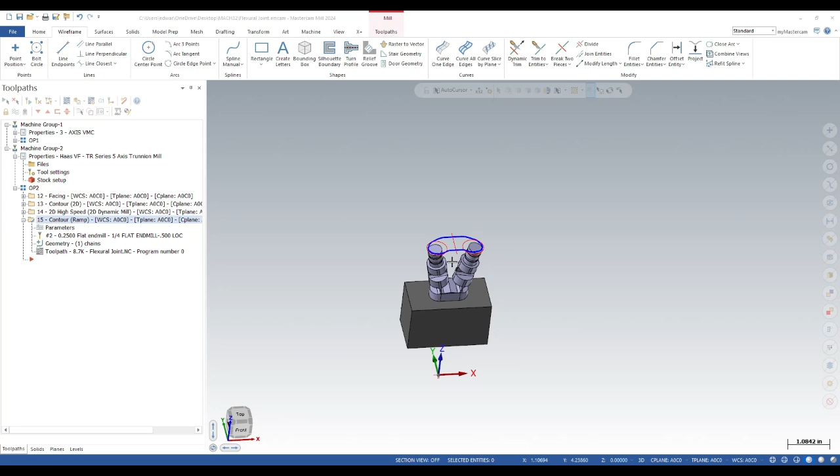Okay, here we go. Op2 part 2. We'll start working these columns a bit better.

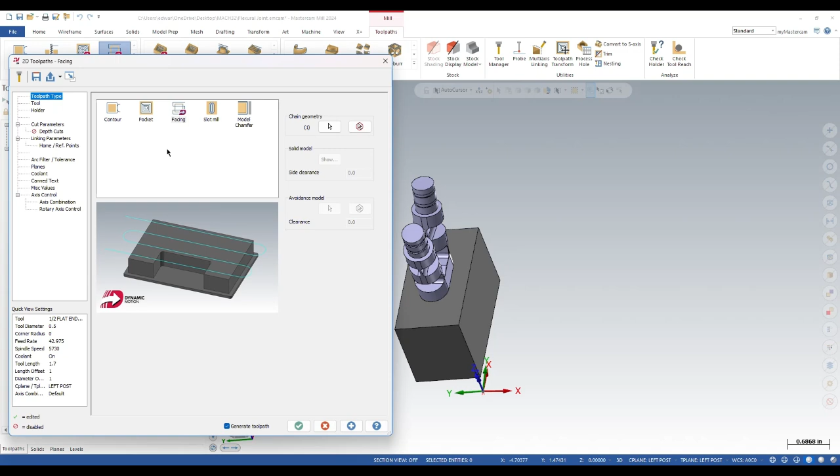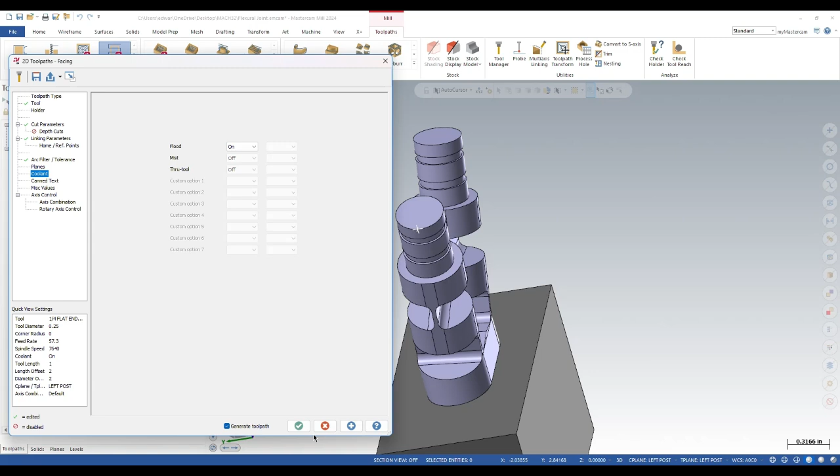Start off facing. Do a dynamic with a 30% step over. Double check my depth. Okay, all that looks good. Planes are correct. All right, one thing I forgot to do, let's go in real quick while we remember.

Set these to manual 0. If you're not getting the little message that pops up, it could be because you're not pressing enter after you type in the 0. So make sure you do that.

Alright, let's go back to WCS here. C and T on the left post. Alright, so facing. Alright, looks good.

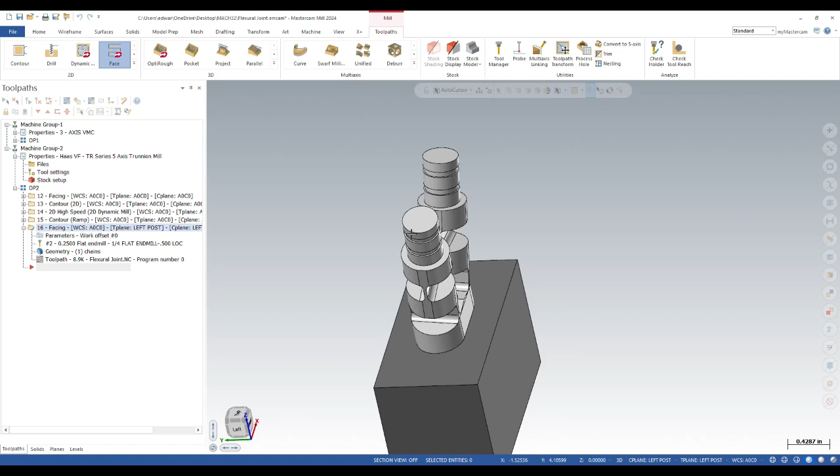Now I'm going to do a semi-finish on the first section of the column. Do it with a contour. Alright, want to make sure our arrow is pointing in a clockwise direction. Sticking with that 1/4 inch flat end mill. Cut parameters, I'm going to use computer.

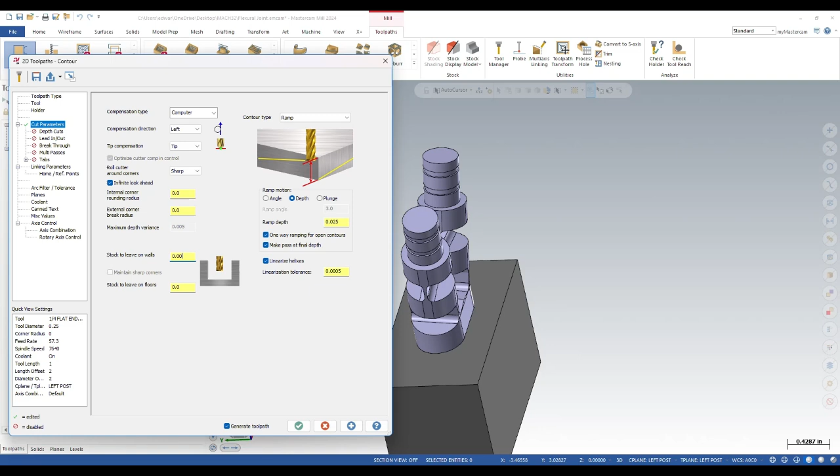Don't really need a cutter comp at this point, so I'm just going to do a semi-finish. I'm going to do a ramp, 25 thousandths per pass. I'm going to leave 5 thousandths on the walls. Do a lead in, lead out. I'll make it 20, doesn't need to be huge.

Alright, depth is going to be to this first step. Top of stock. Planes are good.

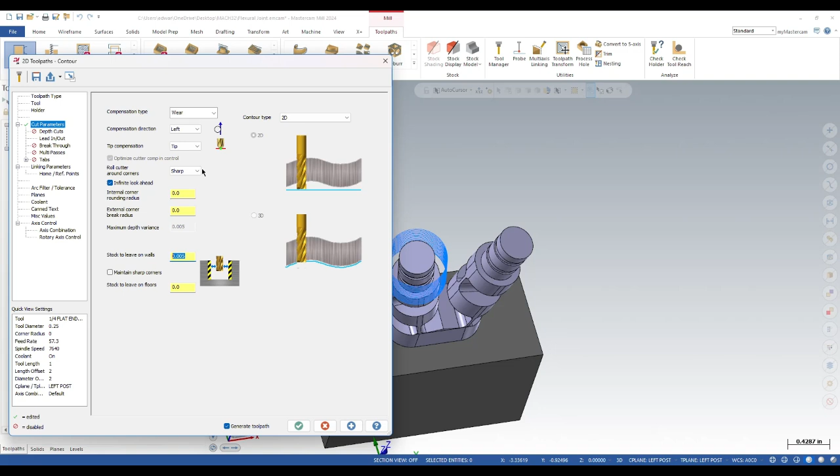Then we'll do a finish pass. Copy that one down. I'm just going to change parameters to wear compensation, 2D contour, leave nothing on the walls. Lead in, lead out's good. Everything else should be good. Green check it. Let's hide that. There we go.

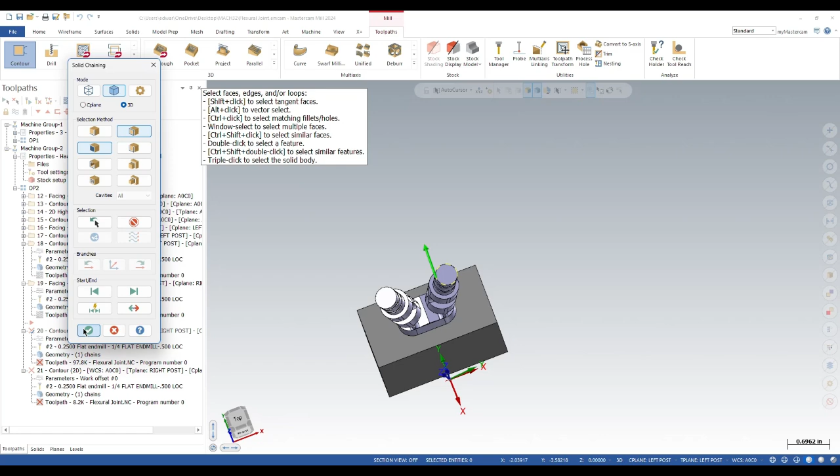Same now for the ramp. We want to make sure geometry's going the right direction, clockwise. Green check, green check. Gen. Alright, so let's see.

Should be fine, but if we're worried about the lead in, lead out, right, can do a little back plot. And it's fine, it's not even close. If it were, you could just go into your lead in, lead out and click this one, enter exit at midpoint, and that will change your lead in, lead out to the other side of the circle. So that works on any circle.

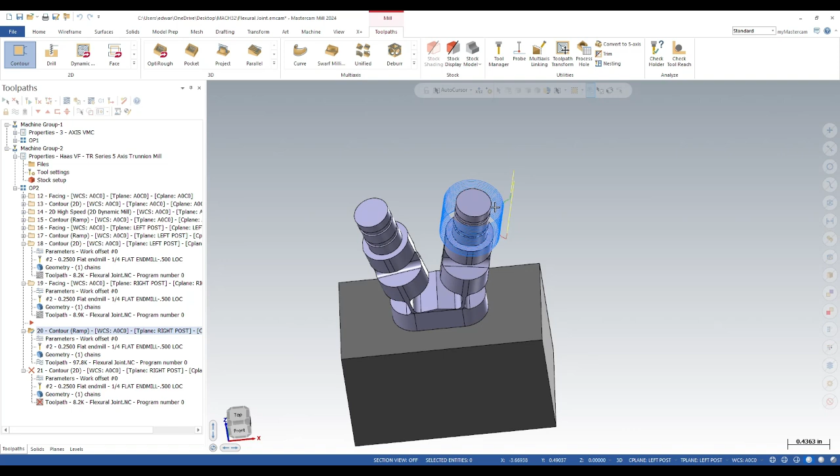All right, so now right click on the geometry, hold the right mouse button down, drag it down to the next toolpath, and replace. Oops. I can regenerate that one.

All right, same thing, lead in, lead out. We don't really want it on that side, so go to the lead in, lead out, enter exit at midpoint, switch it over to the other side.

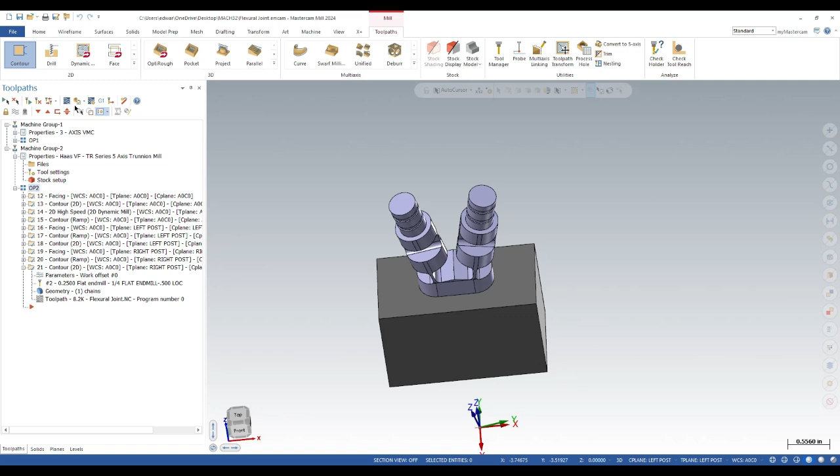All right, I like to save a lot, so. All right. So just working our way down. Next, I'm going to do the grooves before we continue down the columns.

So for the grooves, we're going to be using a key cutter. Let's see. Post, so we'll do another contour. I'm going to select the lower one right there and right there.

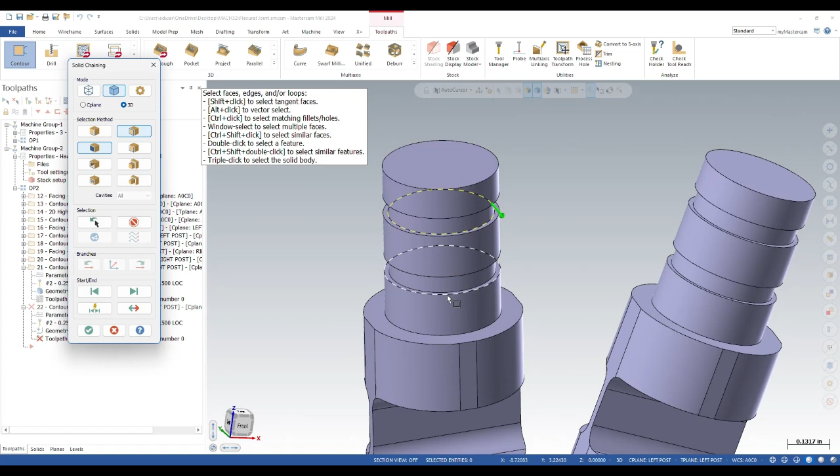I'm going to use a 1/4 inch diameter key cutter. There, so it's got 60 thousandths cut thickness. Just so happens that our little grooves are 60 thousandths wide also, so that's ideal.

I think that tool does not have 12 flutes. All right, let's see. Holder. I'm going to give you guys all this stuff, but in case you want to build these on your own.

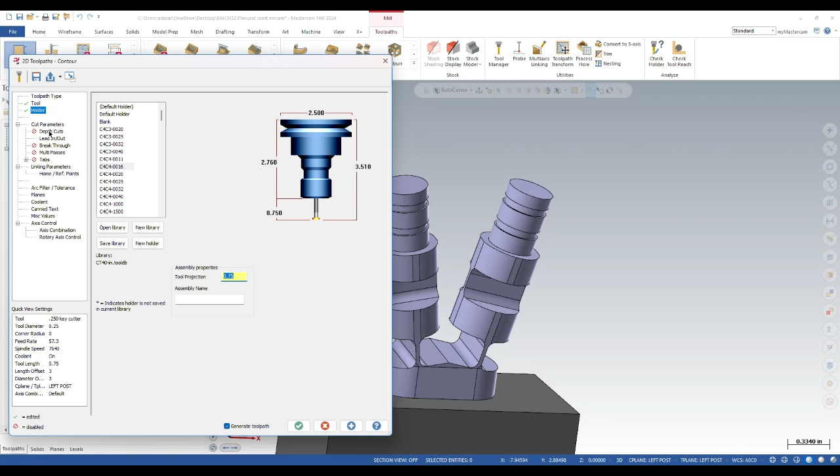Okay. Parameters, where, lead in, lead out, multi-passes. You go one and one spring pass.

All right, for the linking, for this one, since I'm doing both of the grooves in one toolpath, I'm going to use incremental 0 for my depth because I chose the bottom of it. So it automatically gives me the depth if that's what I want to use. So incremental 0, that.

Then just real quick, I'm going to go back to my finish pass. Forgot to activate that, so I want to do. I always like to do a spring pass on the finish passes. So there's the finish pass for the right post, and then finish pass for the left post.

1-1. Okay. All right, so there's the grooves in the left post. So we do the same thing for the right post.

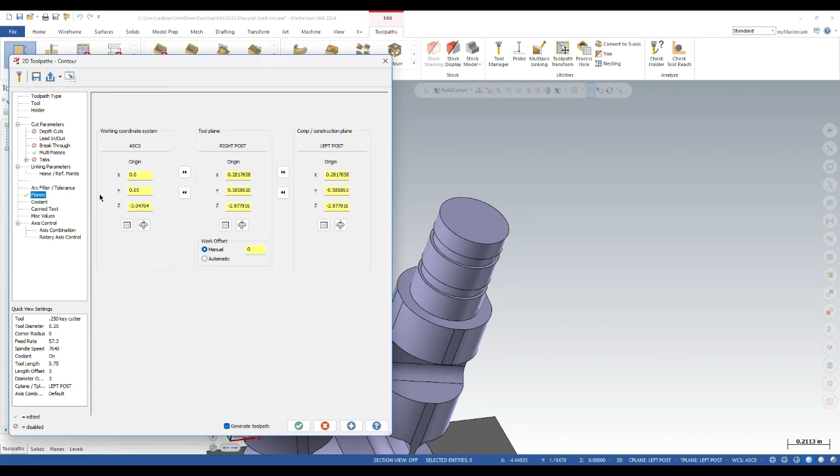And then that, come in here. Change my plane to right post. That, there we go.

We now save again. See, let's do a little verify real quick. I'm getting there.

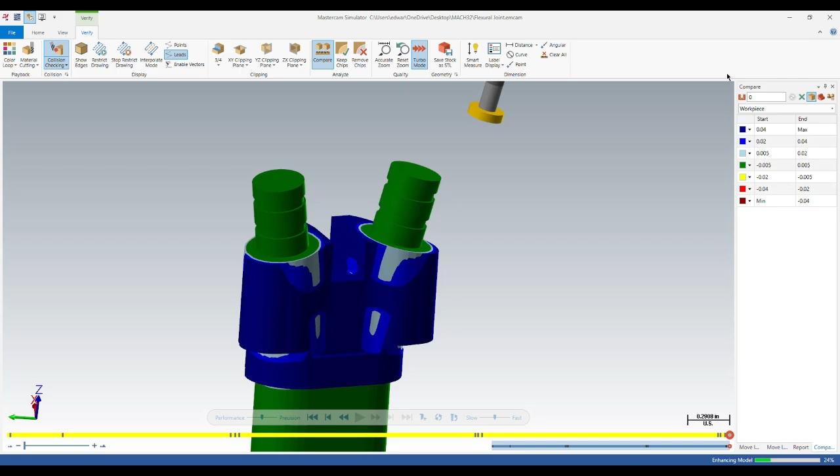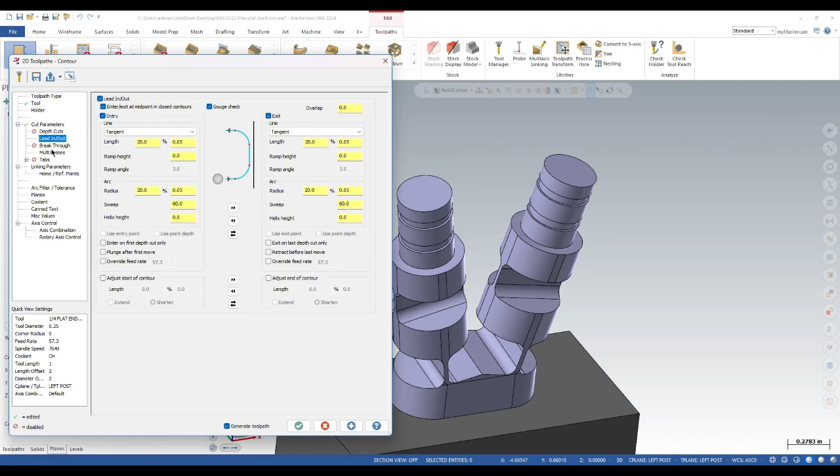All right, let's continue down those bosses. We're on the left boss right now, left post. Back to the flat end mill, and I'm going to do a little ramp. No multi-passes on the ramp. Linking. Let's go back to absolute on the depth and see how deep we can go. Top of stock - I'm gonna have to set that down here because otherwise it'll start ramping from the very top. All right, let's see what that does.

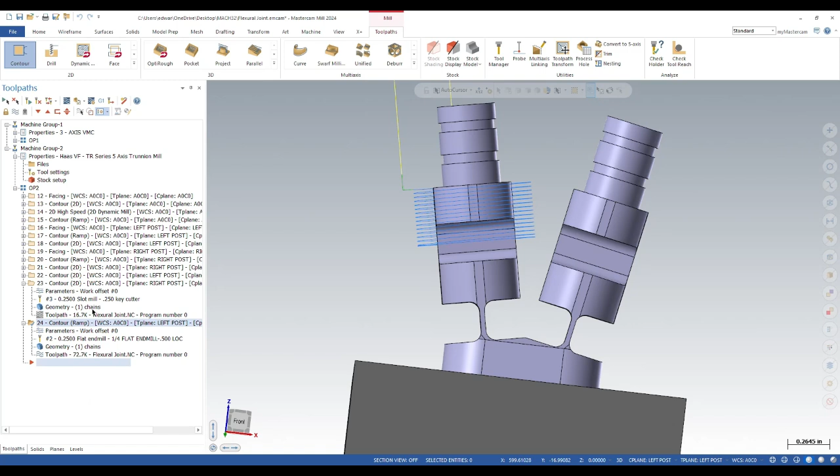Looks like it may be hitting the other side, but we'll have to do a back plot to see that. Close, but it doesn't hit, so we're good.

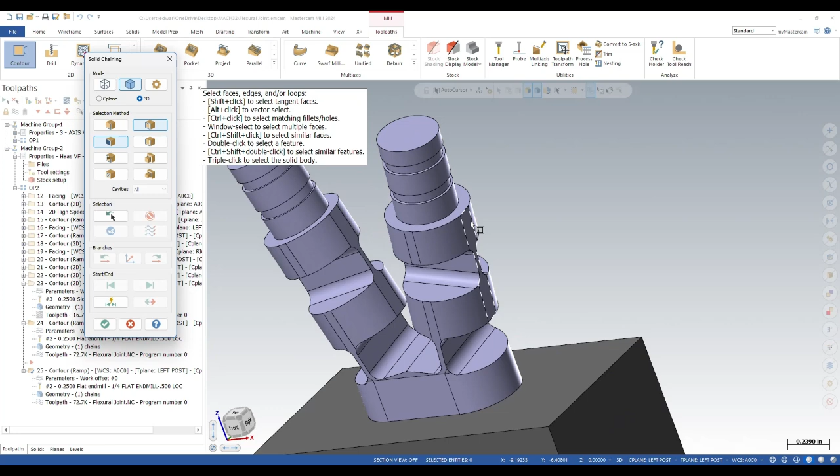All right, do the same thing on the other boss. Don't forget to change your plane.

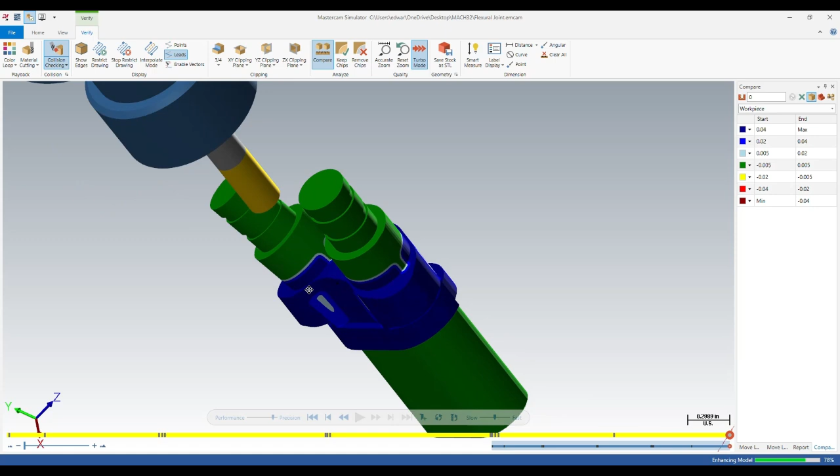Probably want to get rid of these ears hanging out next and start knocking that down as well. All right, let's go ahead and I'm gonna attack those ears on the side now.

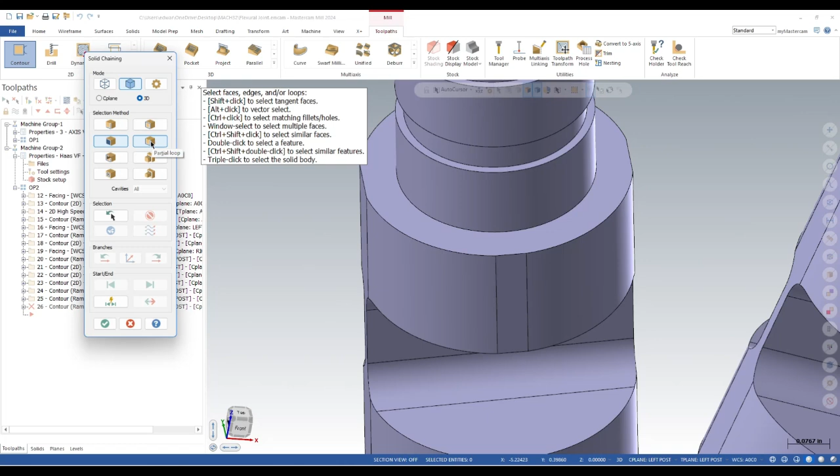Left post. The contour. Start partial loop. Start here on this flat and pick it on the right half so that my contour goes that way. Stop it on the other flat, right there.

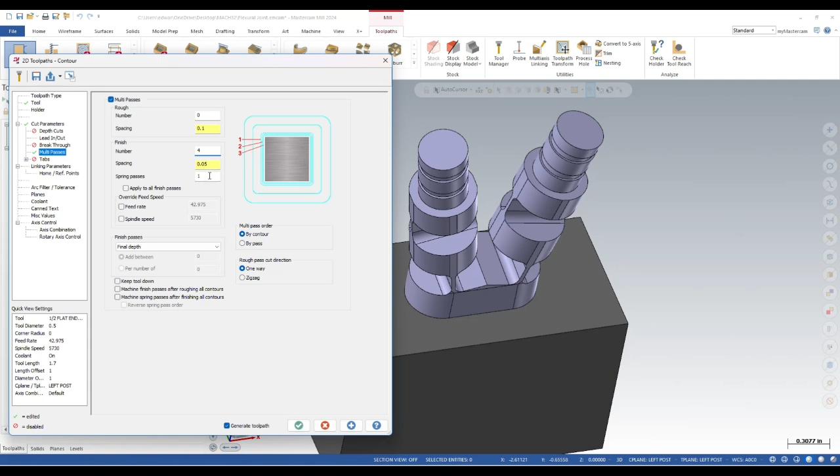Use the 1/2 inch end mill. Wear comp 2D. Alright, gonna do some multi passes, 4 at 50 thousandths, 1 spring pass. Linking - it's gonna be down here, so let's go right about there.

Okay, looks pretty good. So do the same thing on the right side.

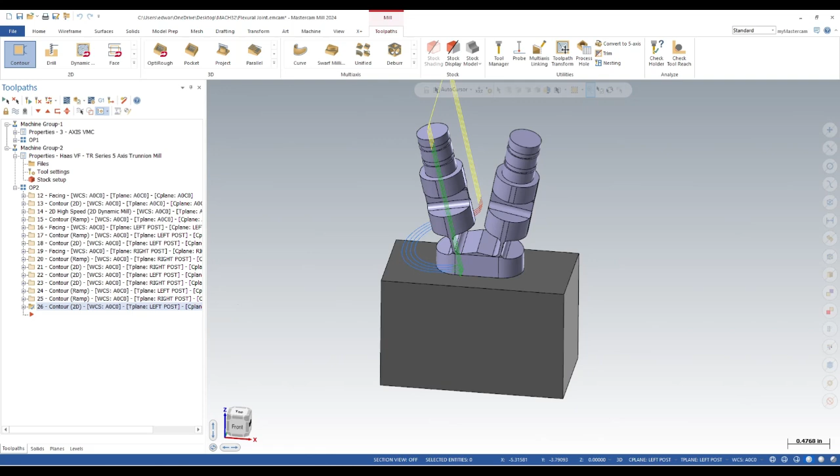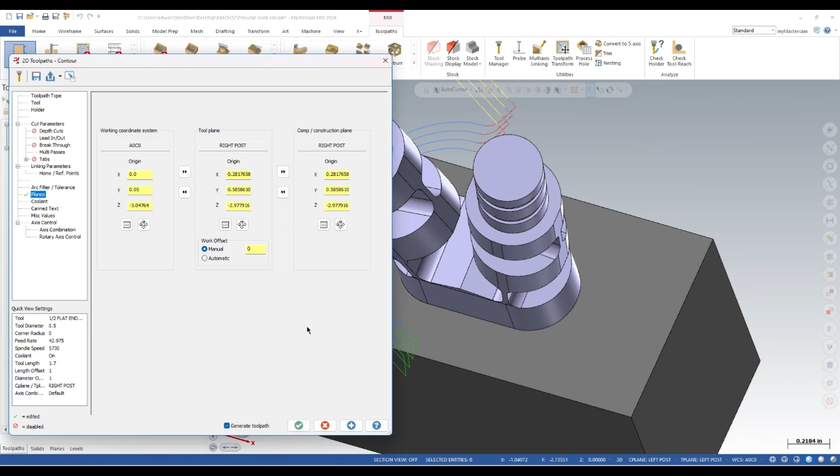Again, start on the flat. You want to go clockwise, so start on the left side of this flat, that edge right there. And then the end of our partial loop will be this flat right there. Green check, and then switch planes to the right post. There we go.

Alright, let's go ahead and get that back material there on this sort of flat plane there, so we're going to need a new plane for that.

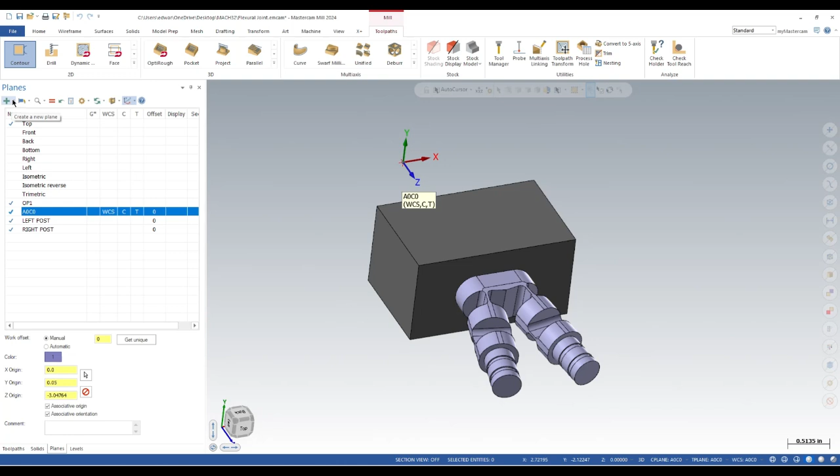So let's see, from solid face, select right there, my X pointing to the right, and then right here I'm going to choose reselect to move the origin to my origin there, and then I'm going to call this plane back flat. And I can set the work offset right here also, manual 0.

You can check. Alright, so yeah, I want to get that sort of material that's there and sort of finish that, the flat areas. So...

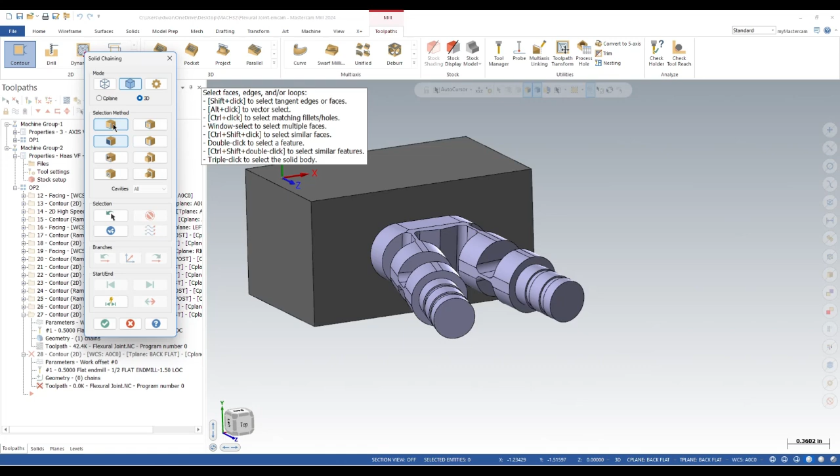Set C and T for my back plane and back to my A0C0 for WCS. Do a contour, single edge, choose this one right here. Sticking with that 1/2 inch end mill. And I'm gonna say I want the edge of the end mill to go a little bit past that edge, just so there's no little lip or burr there or whatever. So I'm gonna put minus 0.05 stock to leave on wall, so that will make the edge of the tool go past that geometry I selected by 50 thousandths.

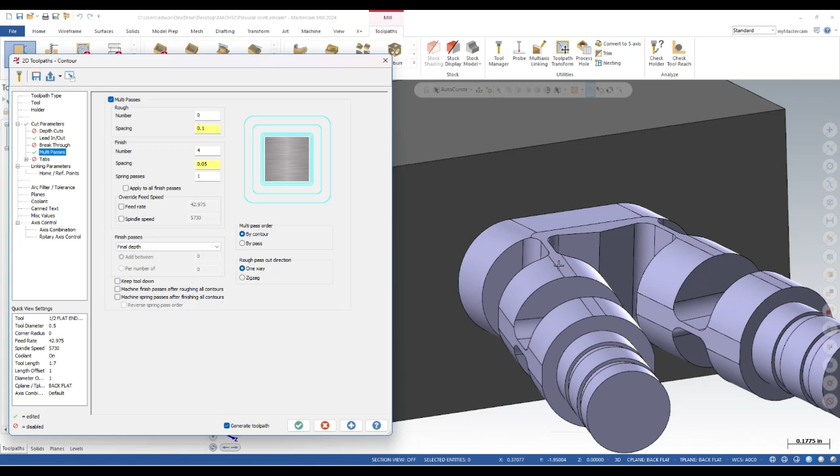Right, and then I think I'm going to probably extend the beginning and the end like 50%, and multi-passes, because I do want it to come out to somewhere in here, because we already finished those flats, and so we need it to come out to this area where that material still is.

So let's go with 4 at 50. We don't need a spring pass because we're not finishing any walls. And depth will be right there. Top of stock is not doing depth cuts, so it doesn't really matter, but we'll put 1 inch incremental and then retract 1.25. Let's do clearance because it's gonna rotate.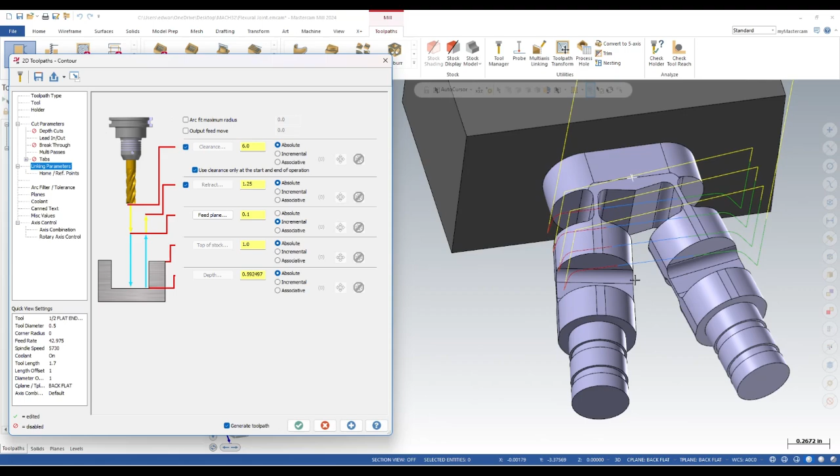So let's go with like a - let's try 6-inch clearance. Let's see, only at the beginning and the end of the operation. Let's hit apply, see what that looks like, and that should get all the material.

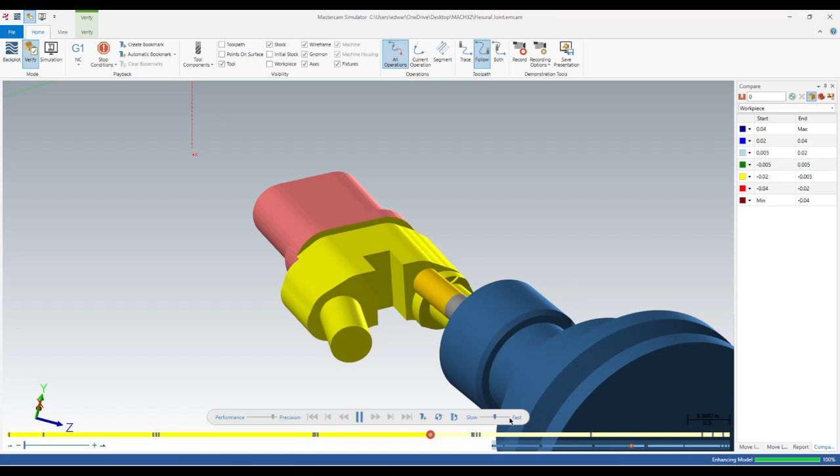So I'm also going to go back to that previous toolpath and add the clearance on there as well. Actually, let's go to 9. Start and end.

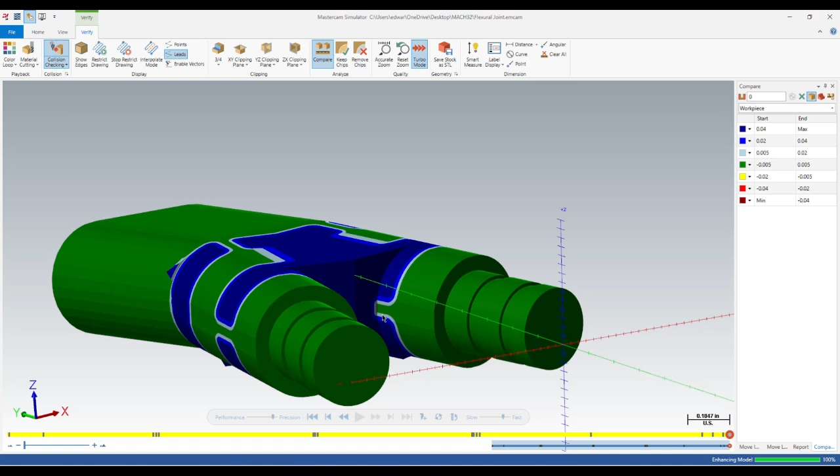I think before we start digging in there any deeper and making those thin flexural areas, we probably want to finish whatever we got up at the top, just do some deburring. So let's close that.

Take my planes back to A0, C0 for everything. Save - I do that all the time.

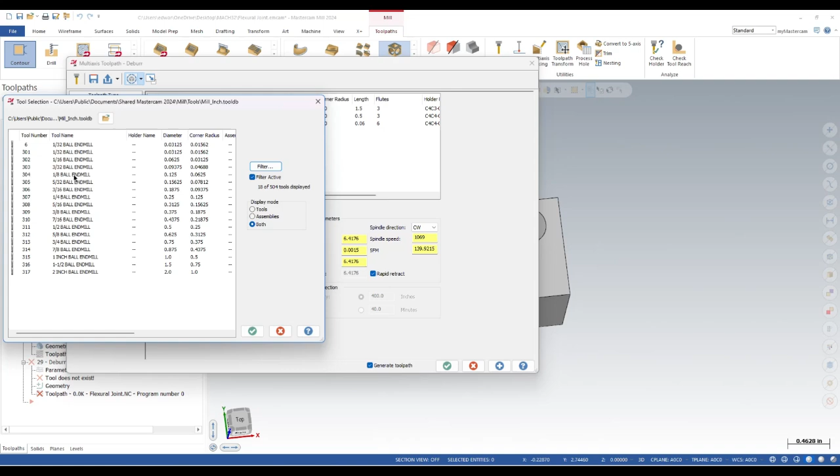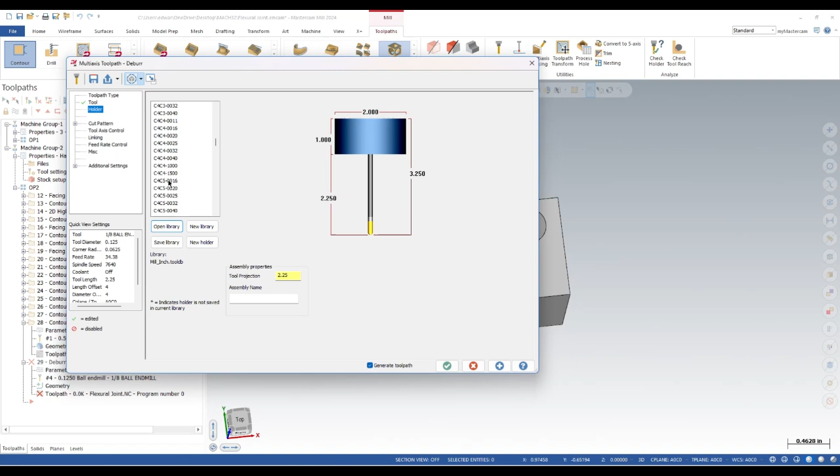Give it a holder. The holders are all in here, it's just to get down to the chuck, so you gotta scroll down pretty far. Like that. And let's put a 0.75 for right now, just to see how that looks.

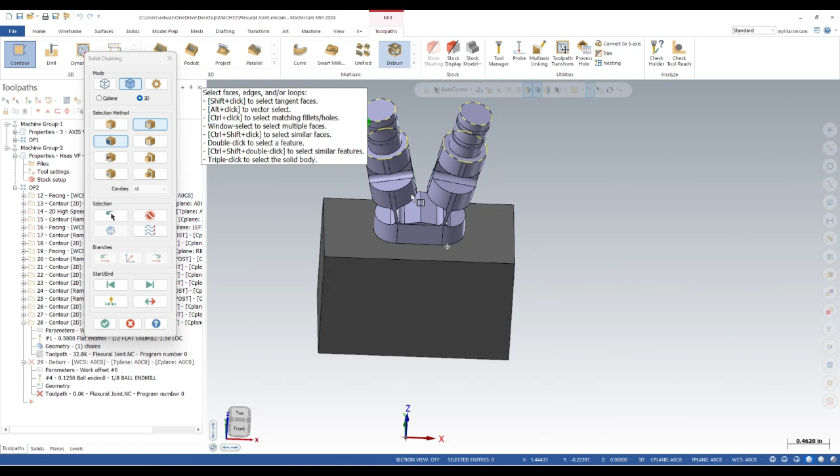Alright, cut pattern, machining geometries, triple click the model. Alright, edge definition, I'm gonna user define. So I want to do this one, that one, and that one - just kind of the stuff at the top that's finished.

Check. Let's see, I'll go with about 6 thousandths. Okay, like that. Like all that stuff.

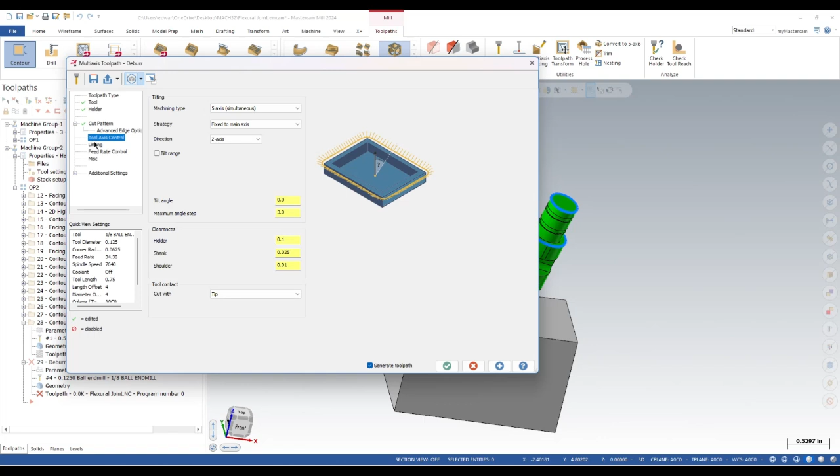It's gonna be 5-axis. Fixed to main Z. Stuff all looks fine. Okay. Coolant on. Let's see what that looks like.

Yeah, it's a little close in a couple areas. We can fix that if we just go here.

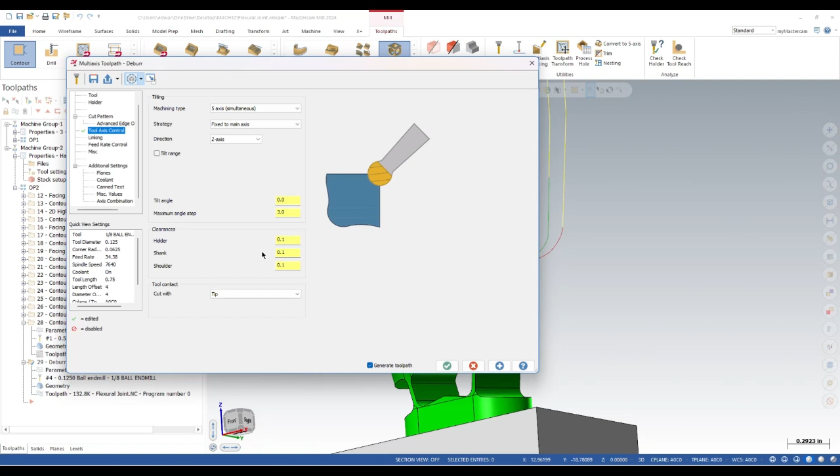See what that does. It's getting a little crazier, and it's not going all the way around, so I might need to reduce those back a little bit. Okay.

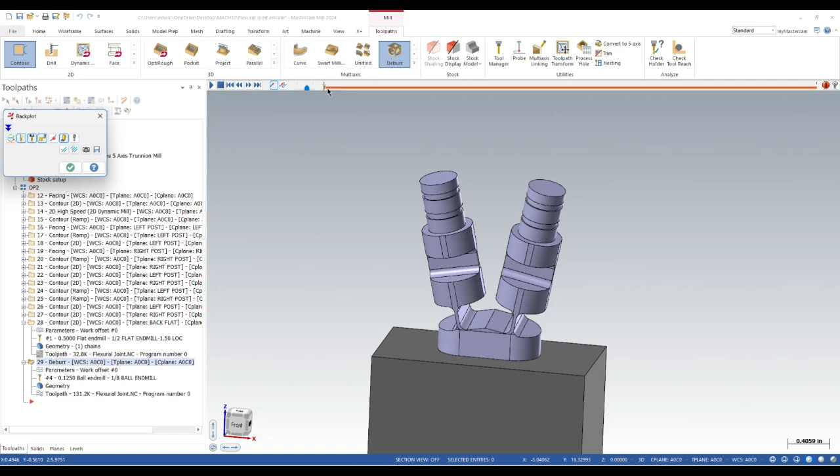Yeah, keeping that tool a little further away from the post, like that. Awesome. Okay.

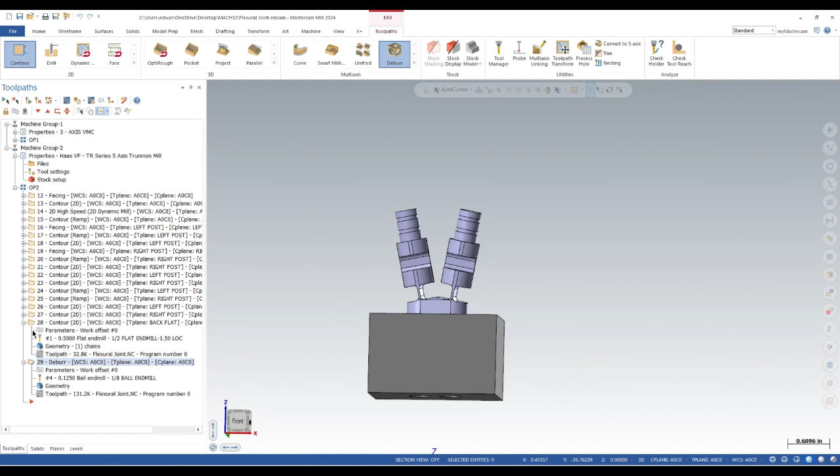So I want to start roughing out these grooves here for the flexure. They kind of look flat, but they're actually not. I mean, again, flat to the plane we already created. They're slightly rotated, so you can see...

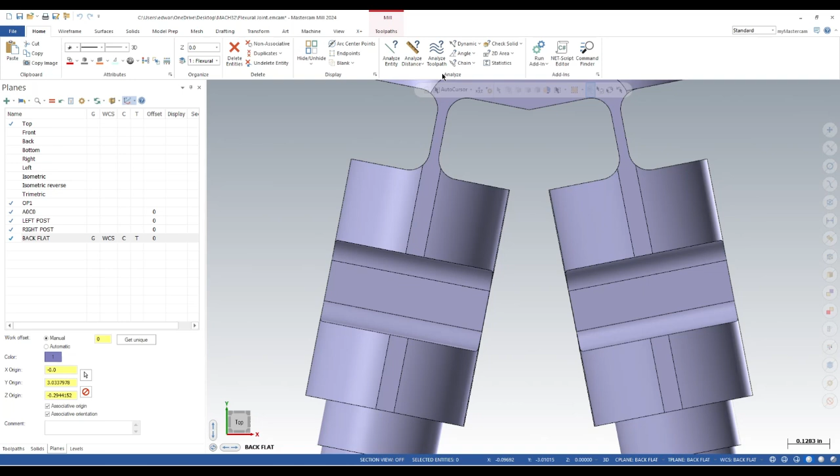If we go, let's just go to the back plane, back flat. Right, so it looks like they're kind of planar, but go to dynamic. You can watch right over here, the Z changes as we move around. Right? So...

Best option is going to be multi-axis curve. So it's 1/4 inch wide, and then the radius in there.

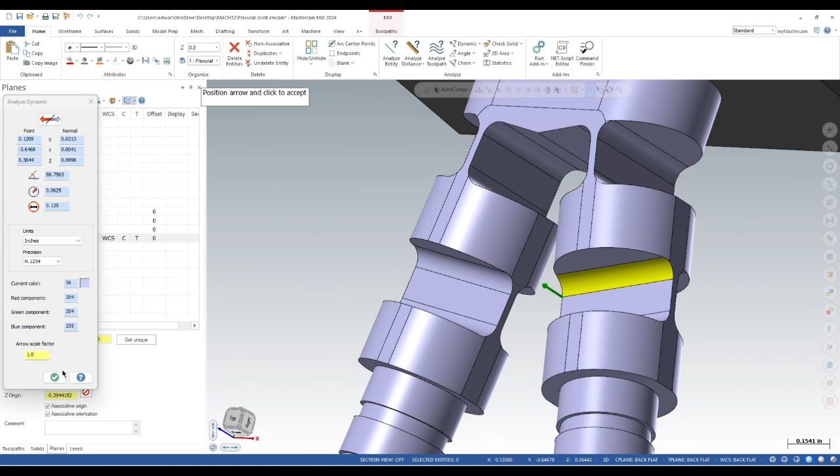Dynamic, sorry, dynamic - so you can use dynamic, and then click on a surface, and you can get the radius of it. You can get angles, get good stuff off of it. So yeah, it's 1/4 inch wide with a 62 radius, so we'll cut those with the end mill of that parameter.

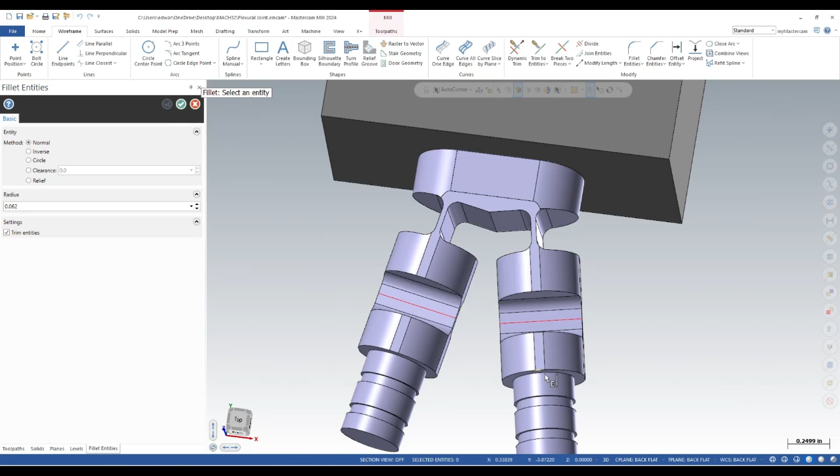So let's see, make some geometry for the tool to follow. Go up the line. I'll connect those lines. Fillet - it's an easy way to connect them. Just like that.

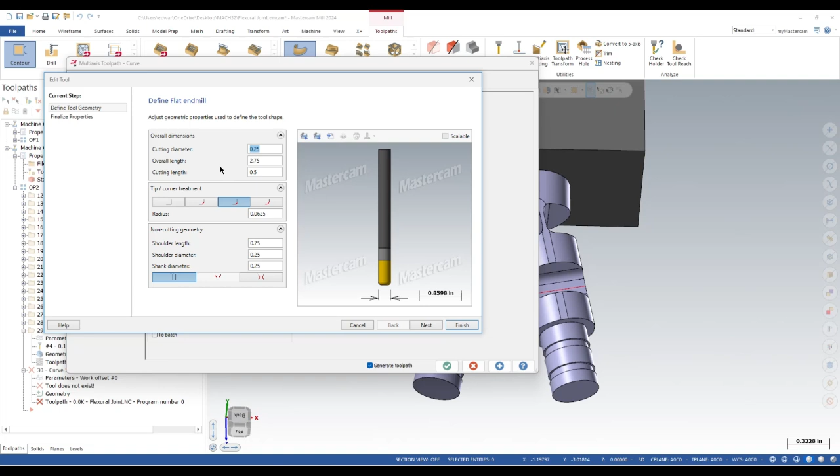So again, for multi-axis toolpaths, you want your planes to be WCS, C, and T on your A0C0. So let's do that. And let's go with multi-axis curve. Tool is going to be bullnose, 1/4 inch diameter, 62 radius, three flute.

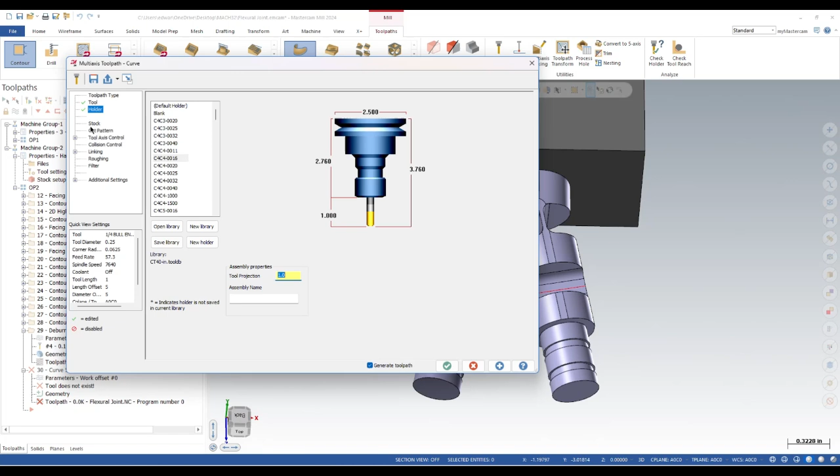Again, give it 1 inch stick out for now just to see how it looks. So, 3D curves, like that. And then I want the center of the tool to follow that path, right? So turn that off - compensation is going to be off, 0 radial offset.

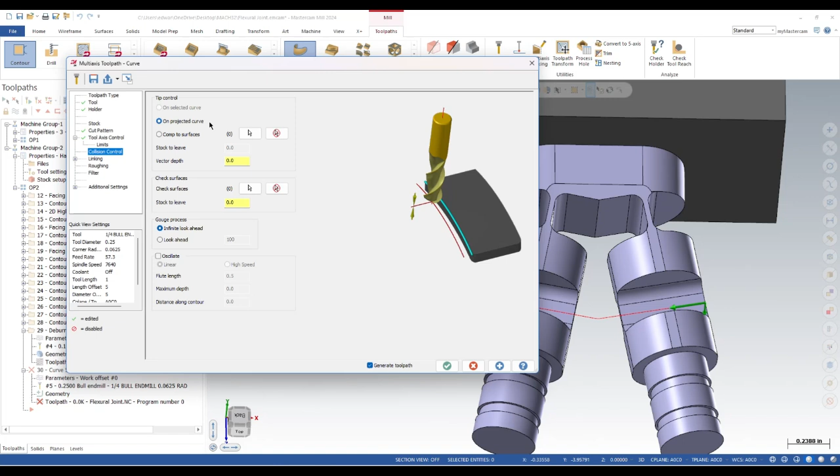Let's see, tool axis control is going to be surface. I'll select the two surfaces right there and right there. Alright, 5-axis, X, 0, 0, 3. Okay, all looks good. Projected curve looks good. Linking.

So I don't want the center of the tool to start right there because then it'll be plunging into material, right? So it's kind of like a lead in, lead out. That's what we're doing, so I'll say 75%. Right.

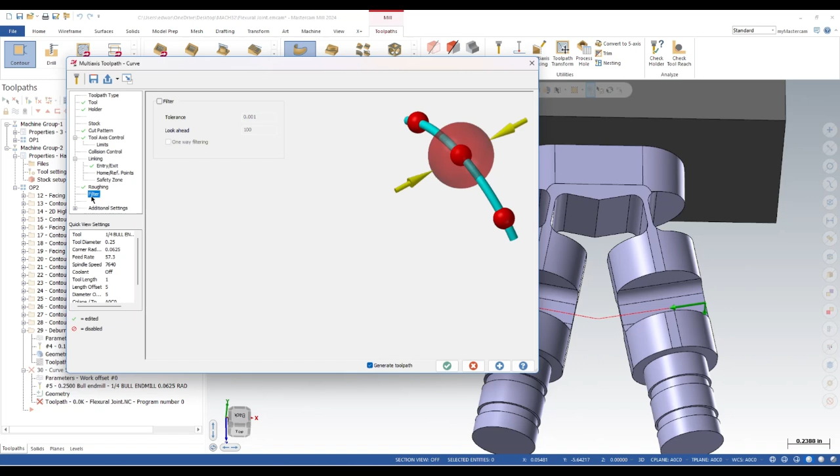And then I'm also going to do some depth cuts, maybe 5 - I didn't measure how deep that was. Going on... let's see what we got. All right, it's pretty good.

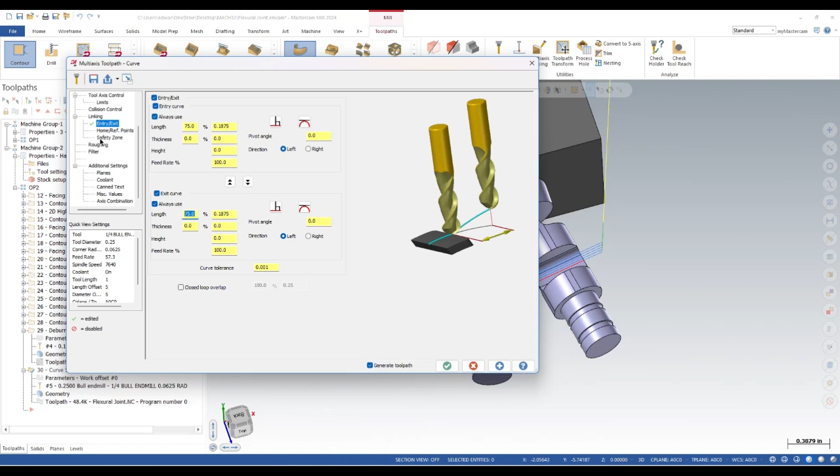All right, so maybe a couple changes. It's got a good lead in, but I want it to lead out also - I don't want it to stop right there. So let's go back here, let's go to exit, 75 as well. And then I'm going to go...

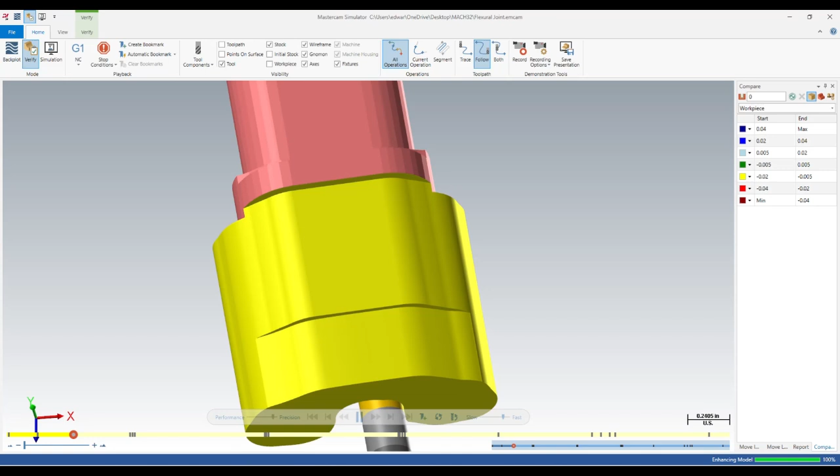Let's take it a little easier - 9. Then we'll do a finish at 5,000. Let's see. All right, looks good. So we'll go back and do the other side now.

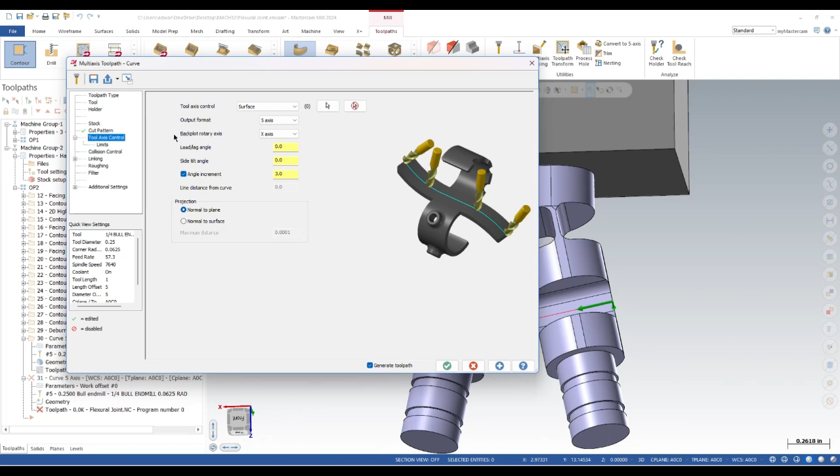All of our parameters should be the same. There we go. Just love watching the movie.

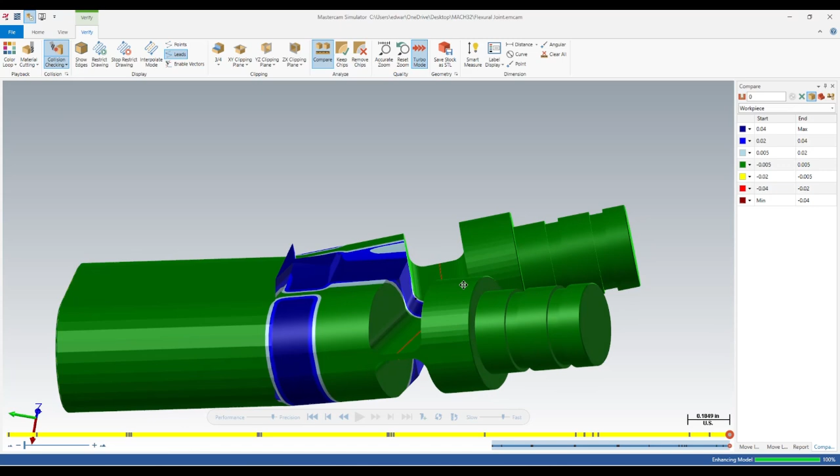So while we're still kind of in this orientation, I want to get this little surface flat here.

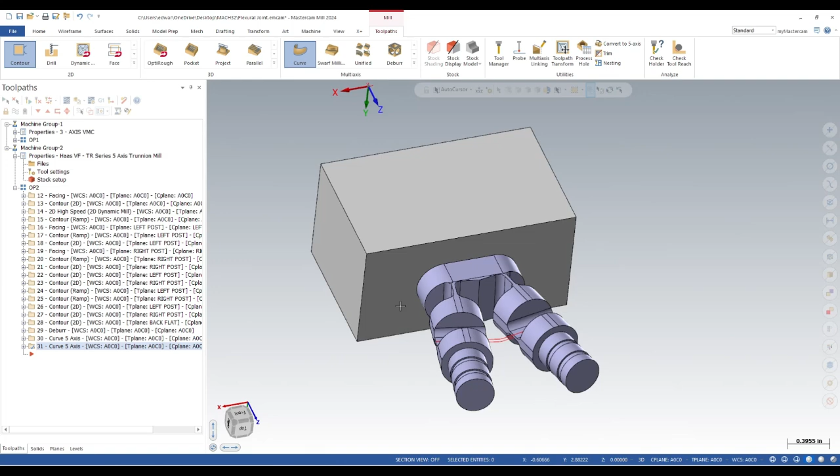So let's do a... I need a plane for that because that's front. Yeah, I'll just do another axis. That edge.

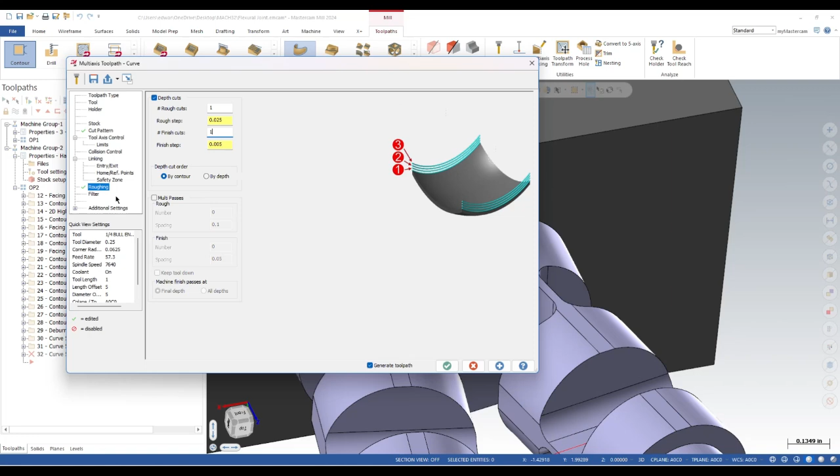Doesn't quite work. I need to move over. So...

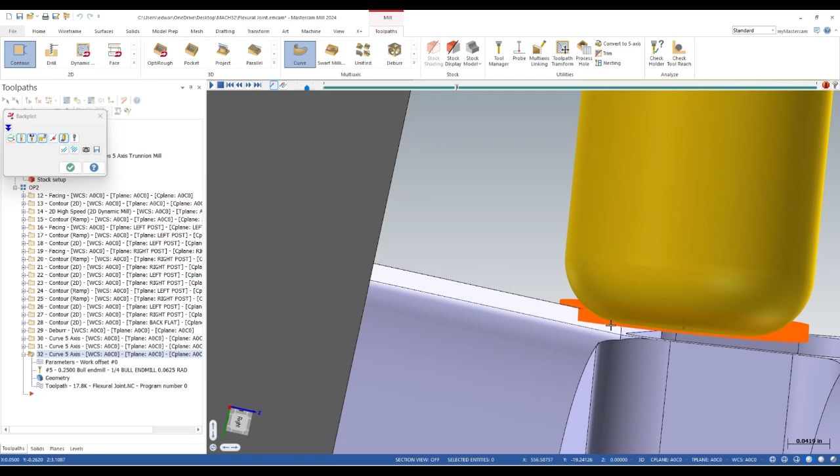It's better - compensation, 62 radial. So now we should get the flat part of the end mill to just hit the flat part here, and then we'll get a little radial blend right there instead of that sharp corner. Let's see what it looks like here.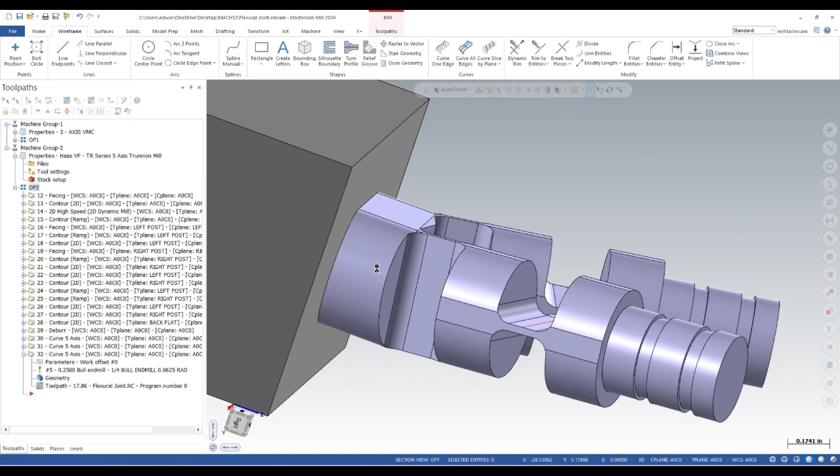So next I'll take out these grooves here on the outside. I'm going to use the same curve, 5-axis, and the same tool. So first I'm going to just draw these lines real quick - I guess we don't even need to do that, do we? We can just use the solid edge and play with our offset. So yeah, let's do it that way.

These are still good, so curve, same tool. Alright, 3D curve. There.

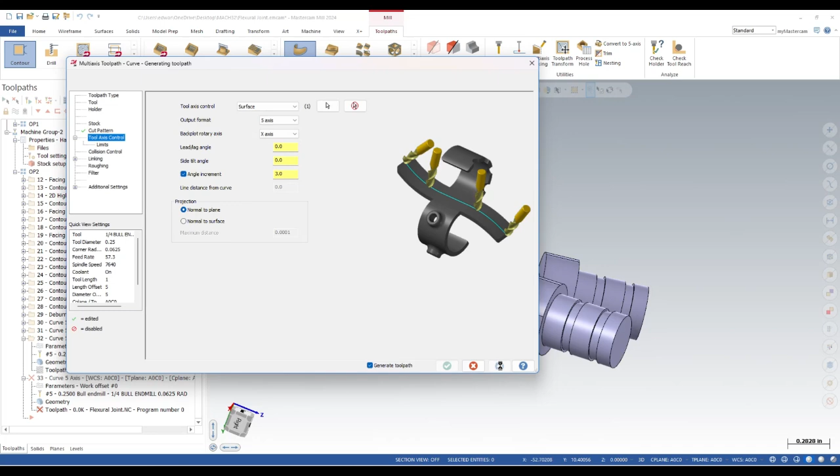We'll see what happens. Oh, looks good. Let's see.

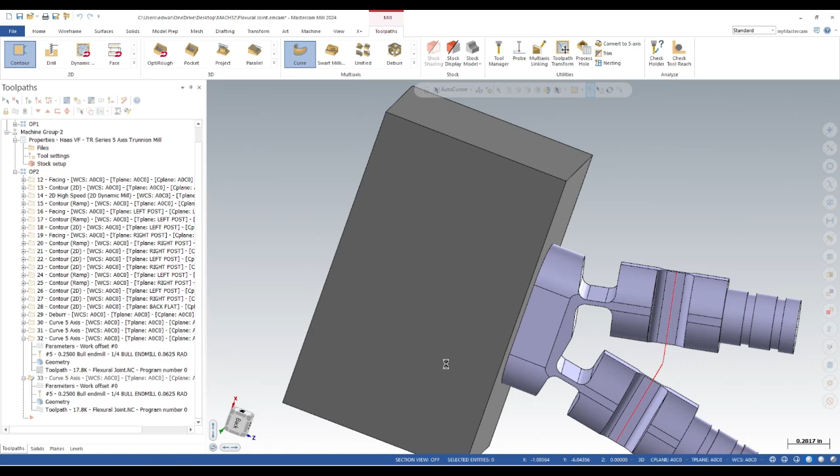Oh yeah, we need to add our depth cuts back in there, I think. Yeah.

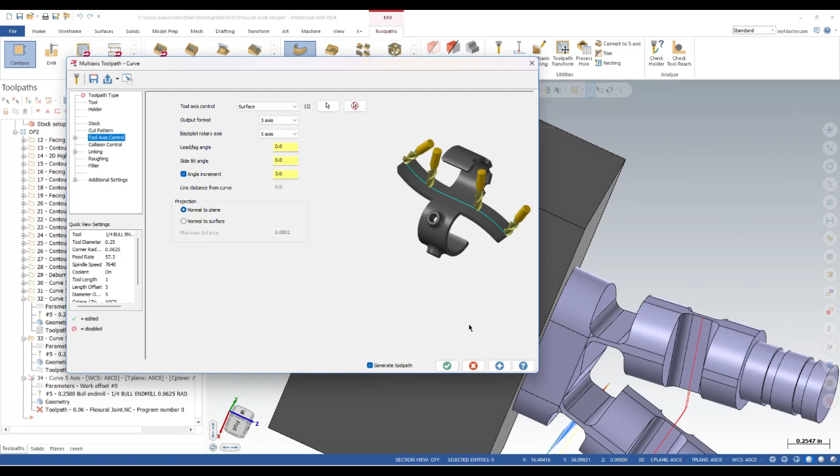Let's do the other side. Oops, forgot to add my surface. There we go - easy peasy.